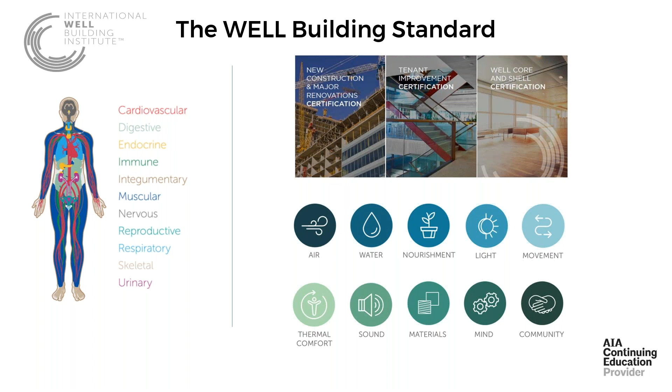The Living Building Challenge consists of 7 performance categories or petals, which are place, water, energy, health and happiness, materials, equity, and beauty. So based on the petals pursued and their requirements, project teams can achieve various Living Future certifications. To be certified under the Living Building Challenge, projects must meet a series of ambitious performance requirements over a minimum of 12 months of continuous occupancy.

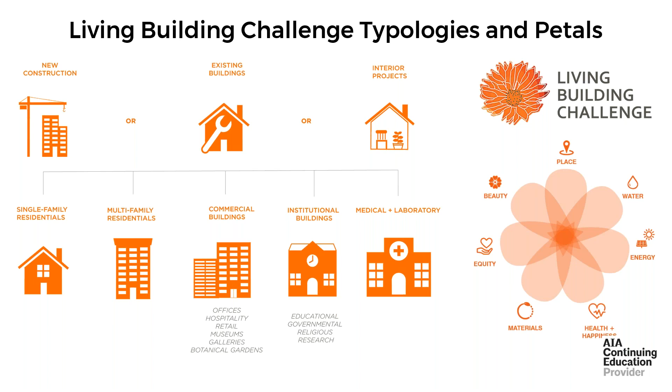So juggling multiple rating system requirements and multiple materials lists, it's important to note that what works for one system may not work for another. So as more and more manufacturers get on board with the newest green building programs and the latest versions, it's unlikely you'll run into this issue. However, there are times when a product will work for one green building standard, but won't work for another. It's also not uncommon to have LEED and Fitwell buildings, or LEED and ParkSmart, or LEED and Living Building Challenge. Really, the sky is the limit on what certification programs project teams want to go after. And this will make a little bit more sense in the next section when we talk about green product certifications.

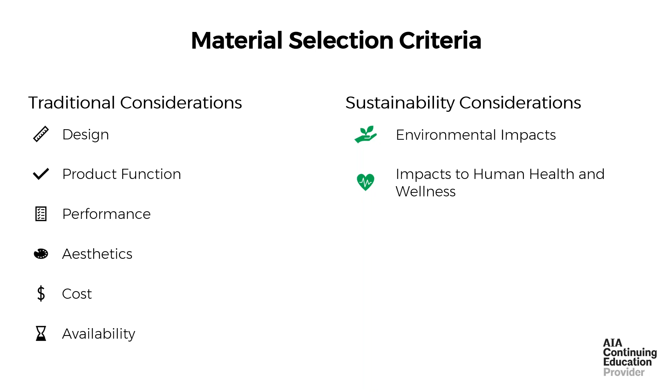The number of green building certifications and standards that are out there are creating increased demand for products with sustainable attributes, and as a result, the demand for green certifications for these products. So I just covered green building certifications, and now we'll talk about green product certifications. In order to achieve the green building certifications that I just discussed, you need green products.

There are a wide range of certifications and attributes that manufacturers can use to promote their products as being sustainable. The sustainable attributes of a product advise project teams that a product has met a standard and offers either environmental or health and well-being benefits. Some of these product attributes focus on both, making them multi-attribute certifications for products. Others focus on single attributes with specific parameters, such as recycled content or VOC emissions. Some require third-party certification, while others do not.

As a result, there are an overwhelming number of sustainable product certifications and attributes that are available. Fortunately, there are an increasing number of sustainable product tools and resources to guide project teams in making informed material selections. And today we'll talk about those that are specific to tile and tile setting materials.

So using LEED as an example, it's also important to note that building projects receive LEED certification based on the number of points achieved. So like we talked about, for certified you need a minimum of 40 points, silver has to be 50 points, gold 60, and platinum is anything over 80 points. There is no such thing as a LEED product. Products cannot be LEED certified.

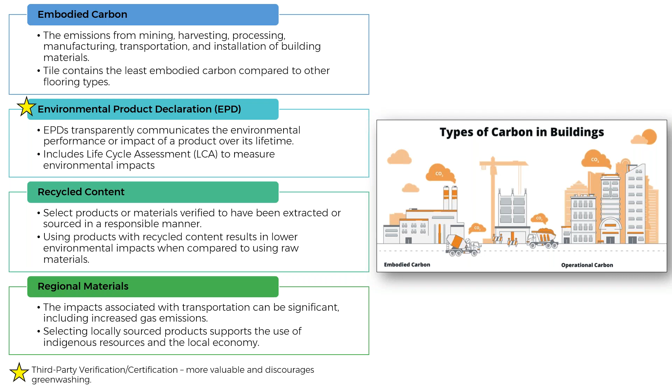These attributes and certifications are related to a product's environmental impact. So we'll talk about just environmental impacts first. In the next slide, we'll talk about those that are related to human health and wellness. The first one, embodied carbon. This is a very new sustainability buzzword. There are 2 types of carbon emissions. There's embodied carbon, which refers to greenhouse gas emissions arising from extraction, manufacturing, and installation of building materials. So smart choices that are made during the design can reduce a project's carbon footprint.

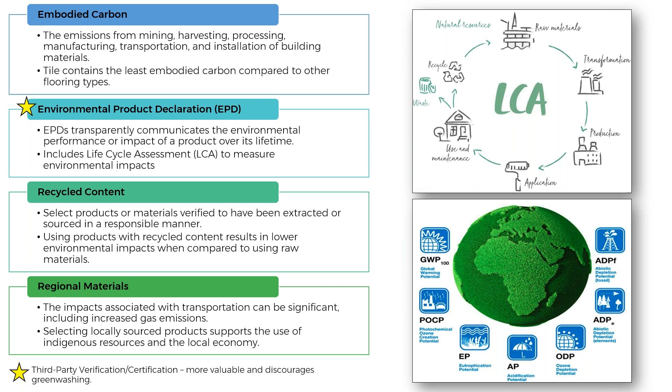There's also environmental product declarations, or EPDs, and these include the product's life cycle assessment from raw material extraction all the way through to disposal, so we can measure a product's environmental impacts throughout its entire life. An LCA looks at all stages of a product's life, including raw material extraction, manufacturing, distribution and transportation, use, and disposal or recycling. And there are several types of EPDs. There's 2 that we'll talk about today.

A generic or industry-wide EPD is one that is released by multiple manufacturers. So for example, for tile and tile setting materials, TCNA has a generic or industry-wide EPD that many manufacturers have contributed to. They publish the average environmental footprint for ceramic tile, cement mortar for tile installation, and cement grout for tile installation. Product-specific EPDs cover a product or products from a single manufacturer.

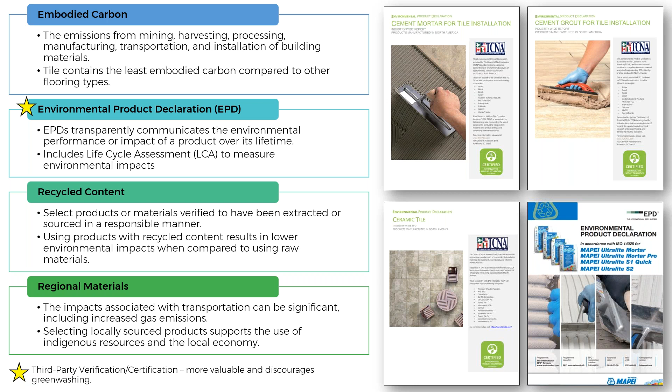Recycled content, many might be familiar with this attribute. It's been around for a while in the green building industry. Using products with recycled content results in lower environmental impacts when compared to using raw materials. Recycled content refers to the percentage of materials in a product diverted from waste streams. Products with recycled content can potentially reduce the environmental impacts resulting from extraction and processing of virgin materials.

Tile and tile setting materials typically incorporate pre and post-consumer recycled content. So pre-consumer recycled content is a material that was removed during the manufacturing process and reused in an alternative process before consumer use. An example of pre-consumer recycled content would be a tile manufacturer that purchases rejected porcelain from a plumbing fixture manufacturer and incorporates that material into their tile manufacturing process.

There's also post-consumer recycled content, and this is a reclaimed product that's already been used by a consumer and would have otherwise been discarded as waste if the material was not recycled. So for example, using car tires instead of sending them to the landfill, reusing them in a different form other than tires in a different manufacturing process.

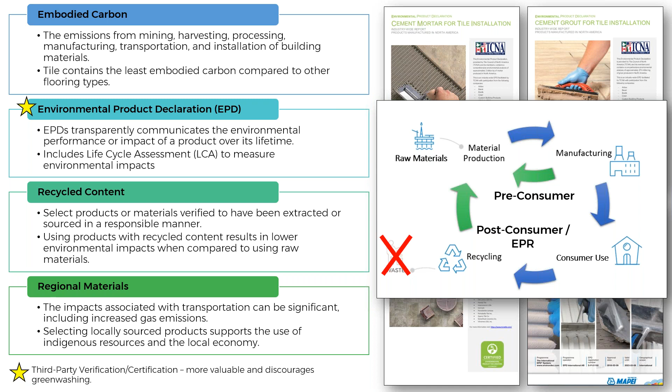And extended producer responsibility, it's a take-back program. Again, that's one of those things that's still being figured out in the industry. There are tile and tile setting manufacturers that do have take-back programs.

So these attributes and certifications are related to a product's impacts, mainly on human health and wellness: the red list free chemicals, material ingredients, VOC emissions and content, and Green Squared certification. Research shows that building materials commonly contain chemicals known or suspected to be hazardous to human health and wellness. Given that most people spend about 90% of their time indoors, there is a growing belief that our buildings are exposing us to hazardous chemicals.

To protect the indoor environment, project teams should try to eliminate potential sources of contamination. So products should be free of these red list chemicals. It's a growing list of chemicals that represent the worst in class chemicals that are found in building products. And typically a manufacturer will provide a letter. There are several chemical avoidance lists, such as Living Building Challenge's Red List, which identifies chemicals to be avoided and have been developed to address this growing concern. Manufacturers can confirm whether or not their product contains chemicals, again, by simply providing a letter.

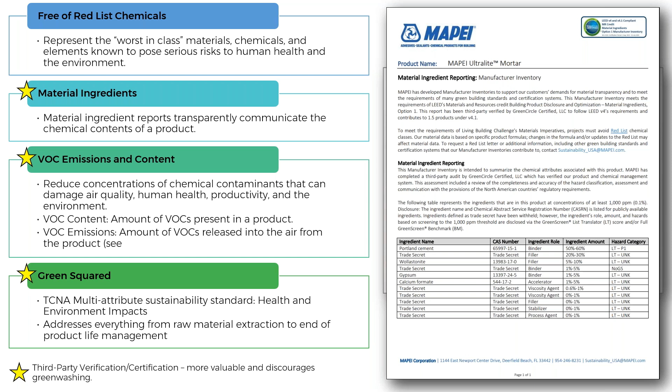It's also important to select products with low VOC content and low VOC emissions. Many finishes must be installed using adhesives, sealants and other architectural coatings that emit or off-gas VOCs during and after installation. Project teams should select products that have been tested and show compliance with California Department of Public Health, or CDPH, for VOC emissions, and look for logos like SCS Indoor Advantage Gold, UL GREENGUARD Gold, SCS Global Services FloorScore, or CRI Green Label Plus, because these have been proven to meet the general emissions evaluation required for VOCs.

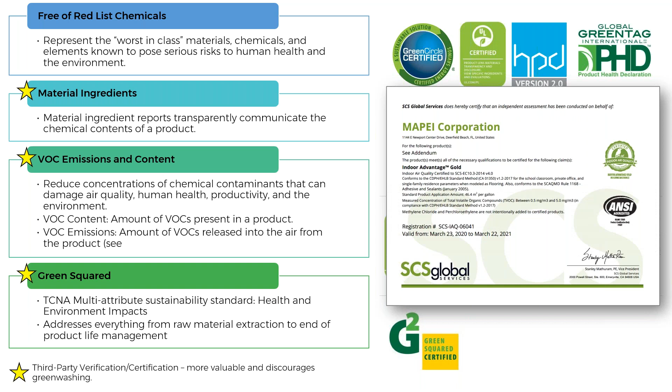And there's also the South Coast Air Quality Management District Rule 1113 for paints and coatings, or Rule 1168 for adhesives and sealants for VOC content. A manufacturer's SDS or TDS may confirm VOC content. Products that are inherently non-emitting sources of VOCs, so tile, ceramic tile, also glass, stone, concrete, clay brick, porcelain, they're all considered to be fully compliant without having to do any VOC testing, and that's only true if they do not include coatings, binders, or sealants.

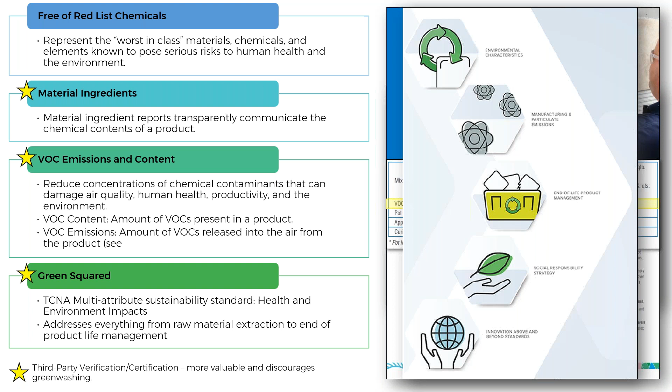In addition, Tile Council of North America has a green product certification called Green Squared. It's a multi-attribute standard that covers both health and environmental impacts and addresses everything from raw material extraction to end of product life management. And this is just an example of a certification that requires third-party verification and auditing.

So how do you pick a healthy and sustainable material? There's a myriad of disclosures, certifications, lists, standards, and labels in the building industry that we just saw, and it can be very confusing. On top of that, sustainability means different things to different people. So selecting products with sustainable attributes requires research and critical evaluation. And the key is to start with the green building certification system being pursued, after which the project team should educate themselves on sustainable attributes that are needed to meet that certification system's goals, and then find products that meet those requirements.

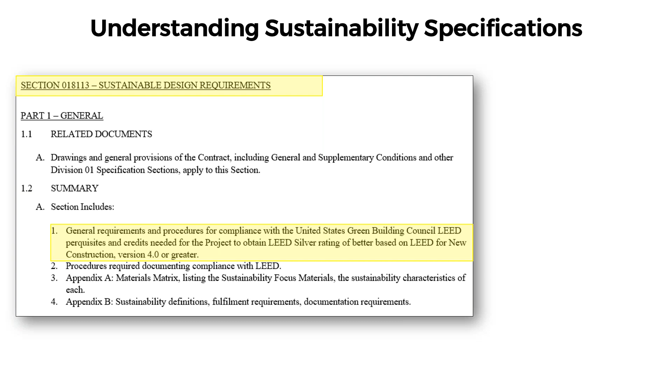So hopefully there are sustainability specifications. So review specs, review 01 81 13 for sustainable design requirements. Typically this spec section will notify you as to which green building certification the project is pursuing. And then also review your scope's spec section. So here in the example, 09 30 00 further details attributes or certifications the project's ceramic tile and tile setting materials should have.

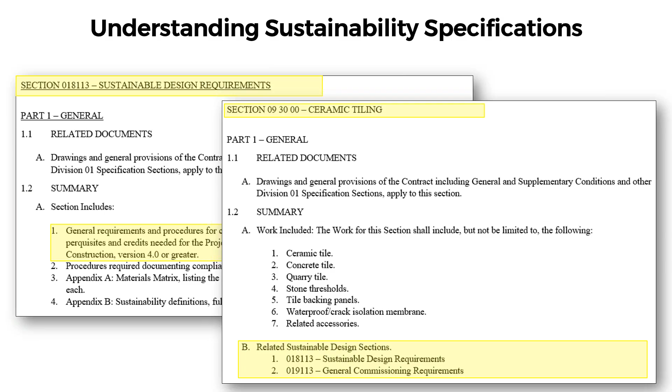And then depending on the project specifications and/or the green building program that the project is pursuing, you may be asked to provide several certifications or documentation for one product. So depending on the green building standard your project is pursuing, some sustainable attributes or certifications may be more important than others. Use the specifications as a checklist.

In this example, the project specs ask for recycled content, a material ingredient report, a VOC emission certification, compliant VOC content, as well as an EPD. And note that these specifications are not asking for a specific third-party verifier or certifier that the project has to use. All of the third-party testers, certifiers, verifiers that we talked about when we were talking about the green product certifications are all acceptable. So you just have to look for those graphics to then have a better idea of what the project team is looking for in the specifications.

Will every product meet these specifications? Probably not. It's best to work with a project team and your manufacturers to find the best product or products for each project, or they can help find alternatives.

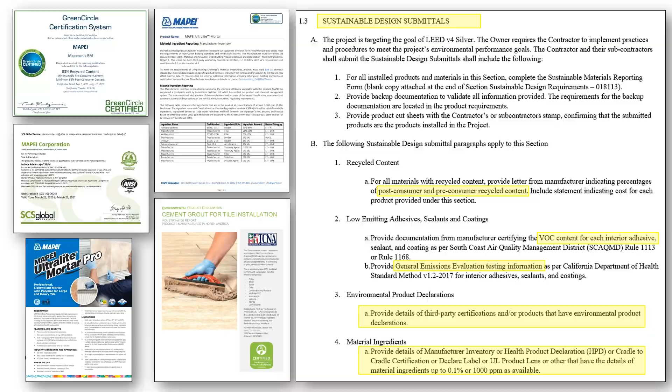A wealth of sustainable information is available and continues to be developed pertaining to green products. Typically, required documentation including certifications, labels, resources, a list of sustainable products, and applicable green building standards and certification systems that manufacturers' products can contribute to can be found on a manufacturer's website. They would have the most information on product certifications, testing, etc. They would also have all of the backup documentation you would need for green building certifications.

When should you ask for this material, or this information? The earlier the better. Manufacturers can help you with product certifications or help find alternatives if the product selected does not comply with the selected green building certification. Do not assume that every product meets every green building certification program.

There's also free online product databases such as Mindful Materials. It's a library for project teams to select products that meet their project sustainability goals. Other libraries include Ecomedes, Sustainable Minds, etc. And then also there's individual third-party certifications like CRI Green Label Plus, SCS Global Services, and UL SPOT. They have the databases for the sustainable attributes that they test, certify, or verify.